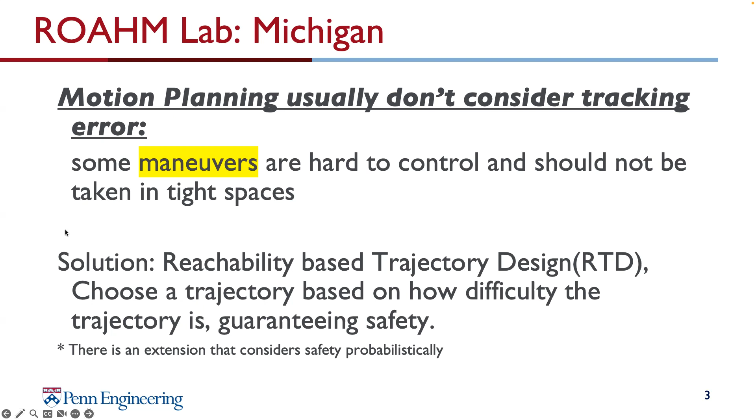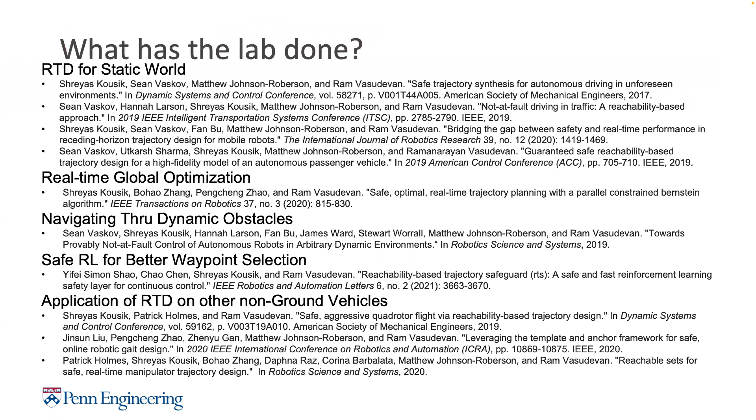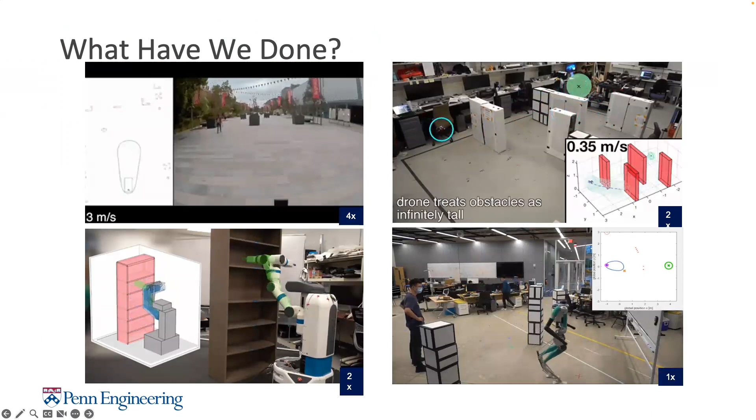So it definitely works. The basic idea is that first we parameterize the trajectory. It's a common technique where we say, okay, we're not going to take any combination of control in the future 2 seconds, for example. We're just going to consider the ones in our control parameter space, and this way we have a limited number of options.

We still have an infinite number of things we consider. For example, the x-axis may be the desired longitudinal velocity, and the y-axis may be the desired lateral position. So if we have some initial condition, we can have a smooth polynomial connecting these two points, achieving a lot of different controls that way.

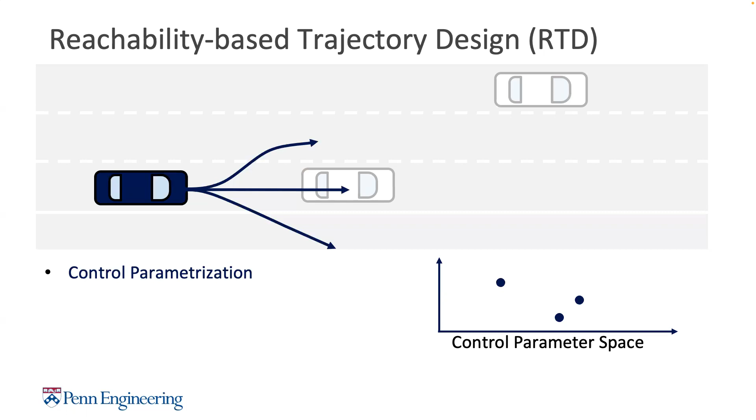However, of course, it's going to be somewhat limiting because you don't take a different U input every time step, like you do in the optimization or MPC case. So that's the limitation, but it helps us say more about safety.

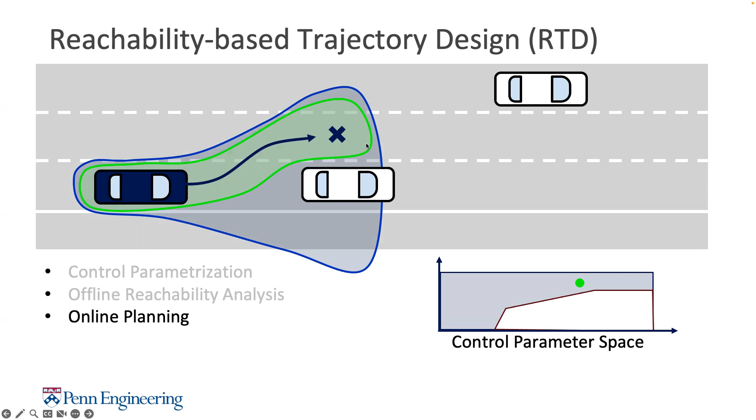So after we parameterize the trajectories in a way we like, we compute the offline reachable set in a way that it is sliceable, which means we can take a specific point in the parameter space, like the green point, and then just shrink the offline computed reachable set really quickly online, so we can do a receding horizon fashion, planning forward step by step.

As you can see, the obstacles are basically inside the trajectory parameter space. In terms of optimization, we basically run a constrained optimization ensuring safety, where the decision variables are the trajectory parameters. So it's a low dimensional space, not as high as maybe MPC, which might have 100 time steps in the future and 100 decision variables. Here it's just 2 decision variables for the future, let's say 2 or 5 seconds, something like that.

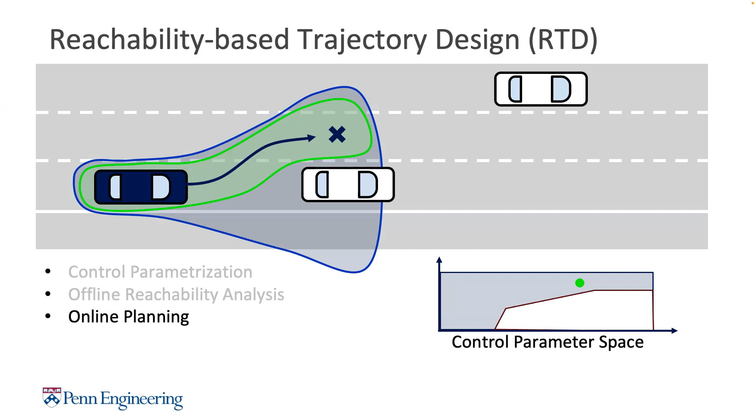Okay, so now we know how it approximately works. Let me talk about what is the representation we use for the reachable set. Here we use an object called zonotopes, which looks like this.

Let me just quickly draw this. This is basically the center of the zonotope, and this is a zonotope in 2D. When you add generator 1, it becomes a line that looks like that. When you add generator 2, it becomes a parallelogram that looks like this. And when you add generator 3, it becomes a hexagon that looks like the thing out there.

So zonotopes are a good object to consider, because if you do a polytope and do linear propagation of it and then try to bound the outside again, the number of half planes you need to represent the polytope grows very quickly. But zonotopes, as this guy showed, who was actually a Penn guy many years ago, the number of generators grows, I think, linearly. I'm not too sure, but it grows reasonably with propagation for many steps forward.

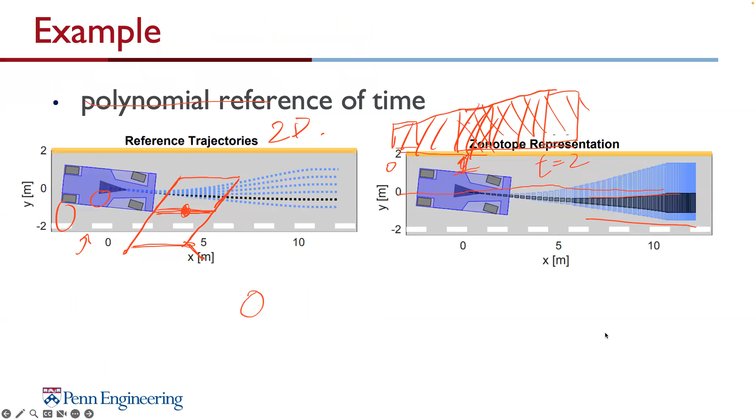But the problem with this approach is that it can be generated sort of slowly, not as fast as we'd like. So you can't just say, let me generate this online and say it's safe. So basically, we have to resort to what I said earlier, which is computing things offline and then applying them online.

This is an example of converting a polynomial reference trajectory into a zonotope representation. So here, the reference is basically a function, these lines are generated by k, which is the control parameter, and t in terms of time. So the zonotope reachability thing basically takes in this ODE and propagates it forward. These are basically explicit evaluation of the polynomial.

But on the other hand, here is the zonotope generation of it. The blue one together is the not-sliced one, meaning, as I was saying earlier, we generate something offline and try to slice it online really quickly. So the black one here is the sliced one, which we say, okay, maybe k equals, for example, the lateral displacement, if k equals -2, then it becomes this black one here. As you can see, we do get some conservatism. On the black line on the left, it's very thin. On the black line on the right, it's sort of huge. But we do gain the benefits we talked about earlier.

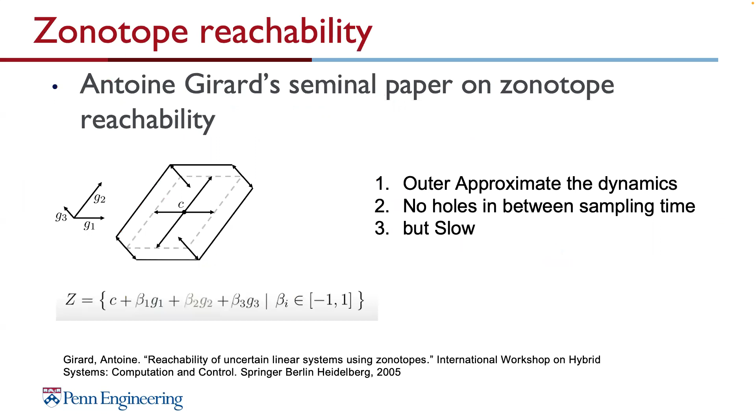Generating the speed trajectory is not doing any reachability. Oh, this is doing reachability. Okay, so previously I talked about zonotope reachability for linear systems, but there's a group in TUM, Matthias Althoff, who worked on extending this to nonlinear systems, so we can have more representations for our reference trajectories.

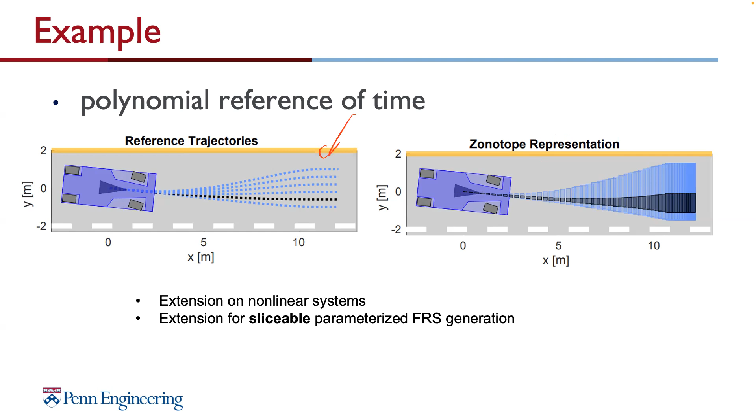Also slicing extensions. But the problem is this is still not good enough, like generating these reference trajectories, generating reachable sets for the full dynamics. For example, if you have bicycle dynamics and parameterize the steering angle from time equals 0 to 2 seconds. If you do that for the full dynamics, still not good enough, meaning it will expand like crazy. For example, here it's a polynomial so it doesn't expand too crazy, but if you do the steering angle parameterization, it probably expands like this, which is pretty unusable.

What are you parameterizing for here? Here is parameterizing. Actually, I have a slide coming up for that, if you just hold on for a second.

So instead, what we do is we split the reachable set into 2 parts. One is the sliced planning reachable set, which is the black region we talked about earlier. And another region is the error reachable set, which means how much difference there is between our real vehicle experiment and our black reference lines. If we add these together, we get the actual reachable set for the car.

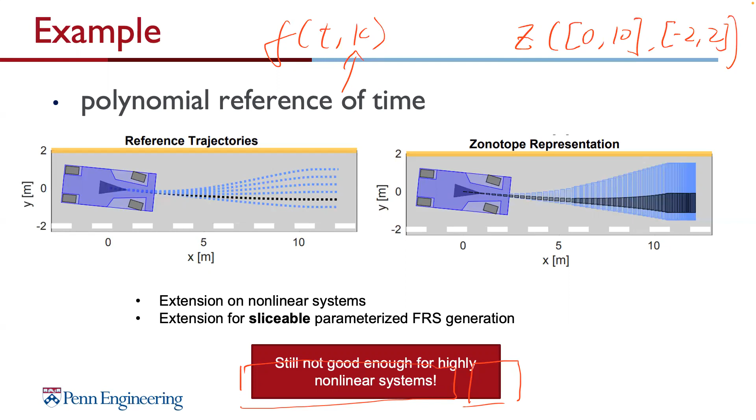What's the model you use here? The car model? No plot here is generated by a car model, right? But in the simulator, we use somewhat an extended kinematic model, because I'm going to say more.

It's just that this first work here is like that, because the main goal of this work is to do safe reinforcement learning, which I haven't talked about because I'm going from a more basic, more core algorithm to applications.

How do you ensure that plus the ERS it's still reachable? Because the ERS is actually generated by doing a lot of experiments, right? Like, this is the experiment, this is our reference, and this is another experiment, another reference. So the experiment corresponds to the reference.

Yes, the experiment is your experience of following that reference. I thought you generate a bunch of experiments and use all of them. Yeah, then it would have huge errors. We want them to correspond to each other.

How do you do this experiment? That's a lot of things. Yes, it's a sampling based method which makes all the guarantees go out the window, right?

So what happens is we have some notion of where the largest tracking error would occur. For example, when you have the largest control parameter, when you try to most aggressively change your desired lateral position.

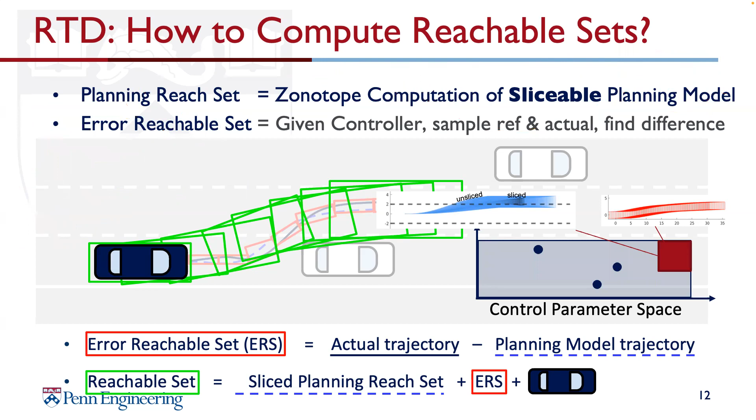This is just an example where we have 4 parameters. 2 of them are initial condition parameters, which we will slice according to the initial condition. And 2 of them are desired, which we can choose online. It's on a straight highway, so the heading is absolute, like the heading is with respect to the Frenet frame, let's say.

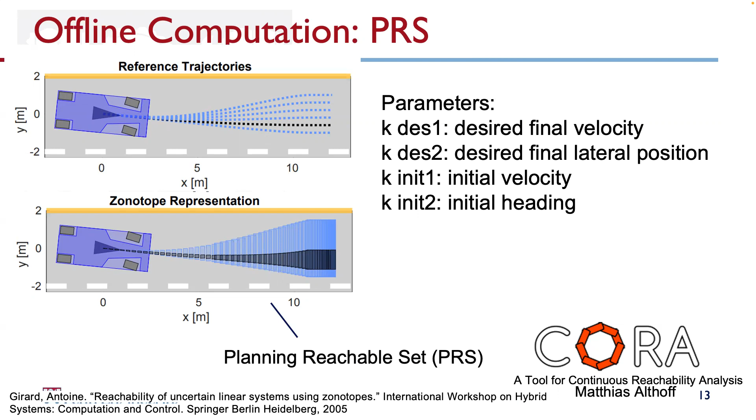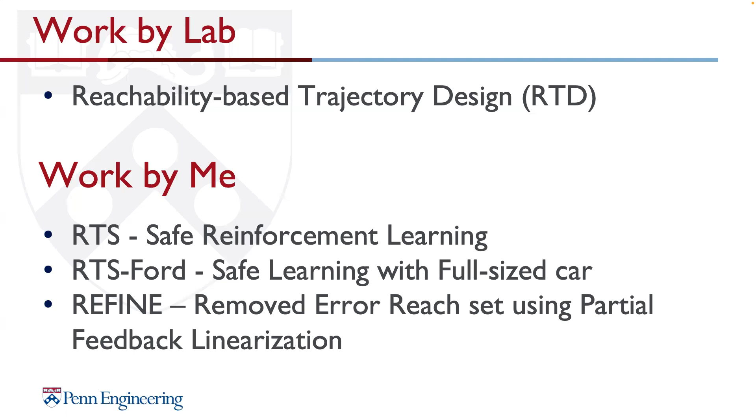So extensions basically, or the things I did, is because we can have this modeling based approach to safety, and it makes a high dimensional problem into a pretty low dimensional problem, we can use that for safe reinforcement learning, because reinforcement learning is sort of good when you consider, oh, we have Atari with 4 inputs or something. So now we just have a game that has only 2 inputs, basically, if you consider the two parameters that you can choose online, in my previous example. So that allows, one significant thing is, it allows reinforcement learning in the real world without any training in the simulator. Basically, you can ensure safety, but the game that reinforcement learning is playing is a much easier game that never hits any obstacles. So,

This is not a real world experiment, this is in the simulator, but the yellow and the black lines are the things proposed by a reinforcement learning agent. The black line is the RT, we call it RTS, basically safeguard. The safeguard corrected parameters, polynomial reference lines. You can see on the top, it always ensures safety and even brakes to a stop when there's no safe parameters available. So one thing I forgot to mention is at the end of each planned trajectory, we have a fail-safe trajectory at the end that takes the car to a stop. So it's consistently feasible, as other receding horizon methods do. On the bottom, you see a naively trained, or a baseline, where it's only reinforcement learning based, and it gets to the goal 90% of the time, but crashes the other 10% of the time because it doesn't have this sense of safety.

So, on the right, you see how the correction mechanism works. Basically, if you have a parameter chosen by RL, it will sample the parameter space and choose the closest one that's safe. This is a reachable set for the green point that's drawn here.

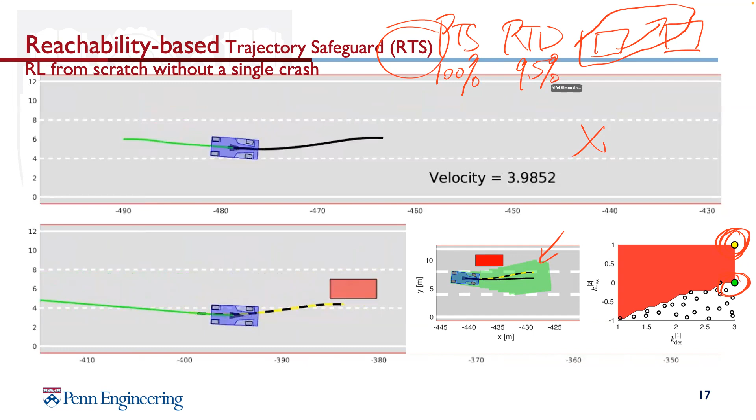Can you say something more about the existence of the fail-safe trajectory? Because this is always ensuring that you have this safe solution. So how does it work, is it a common assumption that you always have this option, like the slowdown?

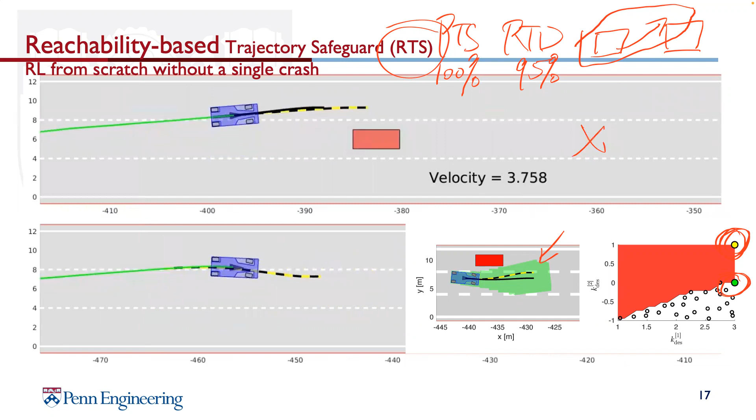Yeah, like the existence of it, like. Yeah, so the fail-safe trajectory in this pretty slow car, like 3-4 meter per second case, is pretty obvious, where all the obstacles are static obstacles that stay in place. But I did apply this to a Ford vehicle, which is the funding agency of the lab at the moment. So we do apply this there, and these fail-safe to stop the car from 70 miles an hour to 0 is not great, right? So I mean, I want to say, because we need, so you solve the problems you can, right? Because we need this safety guarantee, so we have to assume that such a fail-safe trajectory exists.

Can you do that if the other car is moving? Because it will depend on the future behavior. Yes.

So what we can say is, if we have perfect prediction of the other guys, then we are not actively hitting someone, meaning we're not at fault. And that's all you can say about the sense of safety: you're not at fault when someone is trying to hit you. But I do want to talk about the Ford case, which is more practical, and I think it should solve some of the questions you have about this.

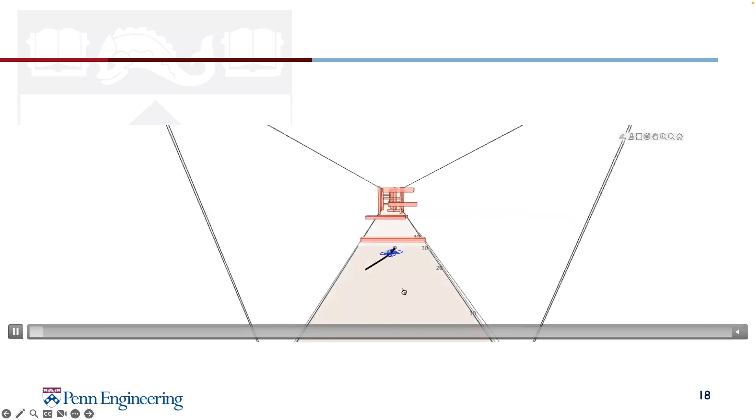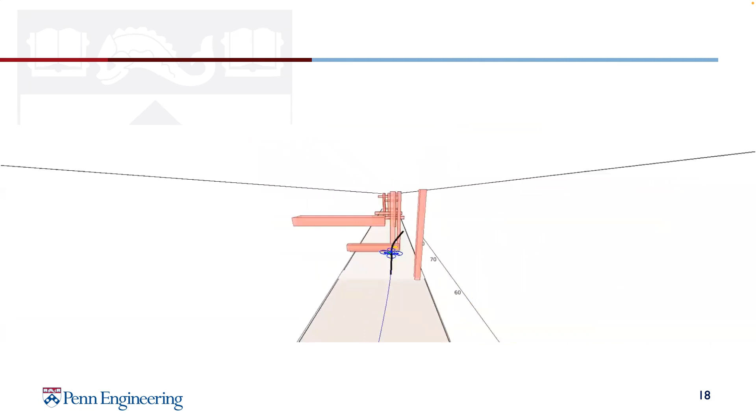But before that, I also want to show this similar thing for a quadrotor. The reinforcement learning just learned a stupid trajectory to always go forward and upward a little bit, because that seems to be the best. But the fail-safe, the RTS, is good because it will avoid things.

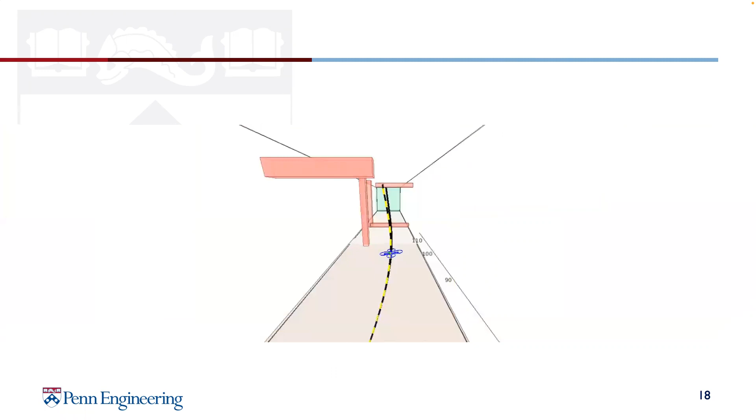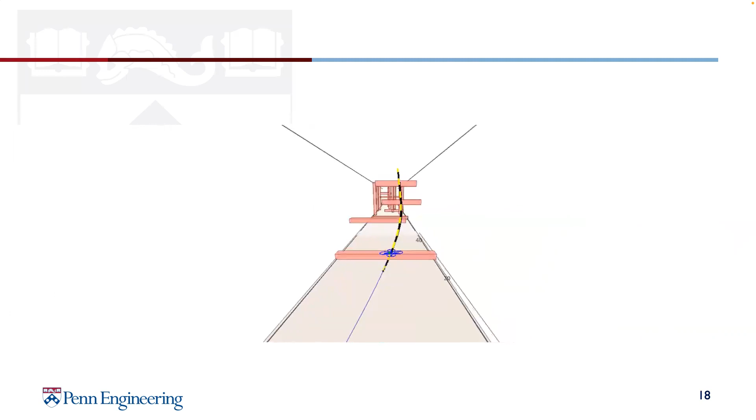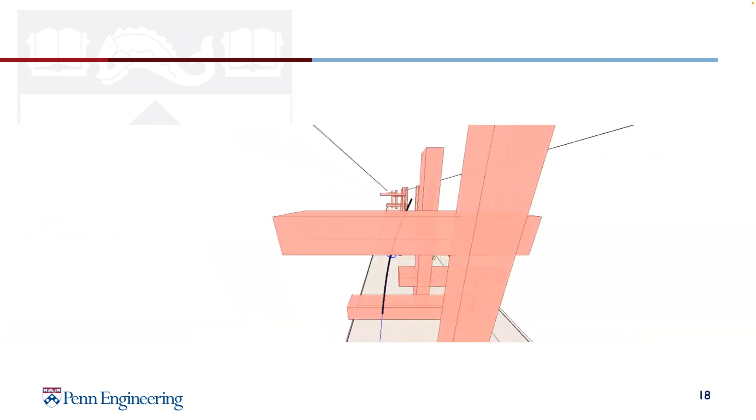So the difficulty in extending this to other systems is finding the control parameters. That's the hard part, right? Finding a control parameter space that's low dimensional enough for reachable set computation, and high dimensional enough for doing interesting maneuvers. Honestly, cubic splines are good enough.

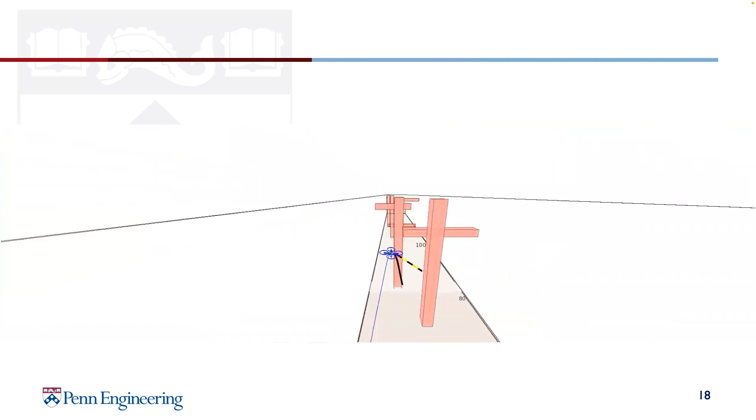So my question in this case is, who's driving in this case?

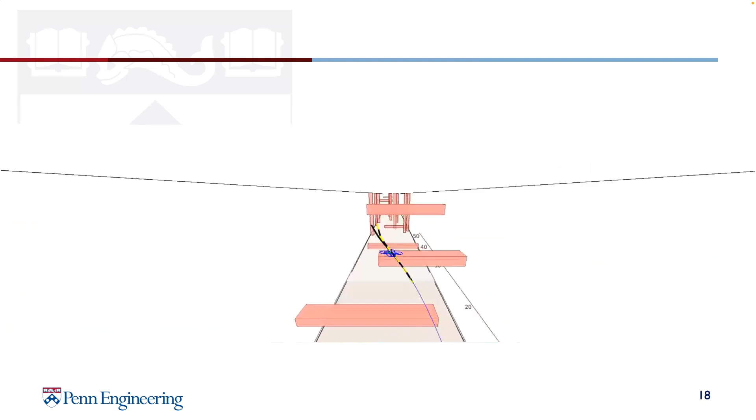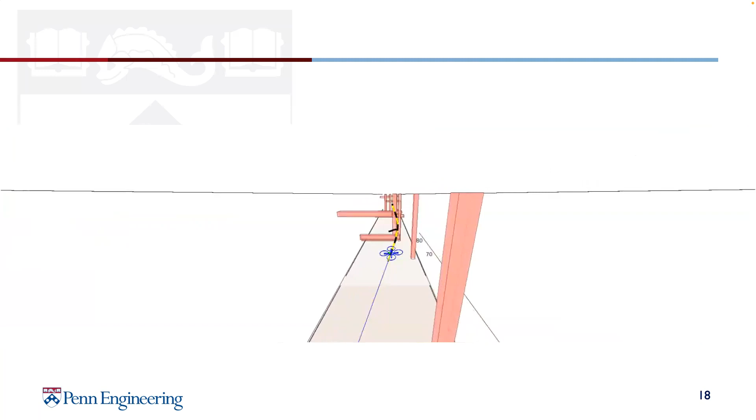So I also trained an RL agent that doesn't use this RTS. It just stays in the starting location and doesn't move to the goal, because it's so far away there's no way it's going to succeed and gain any positively reinforced reward.

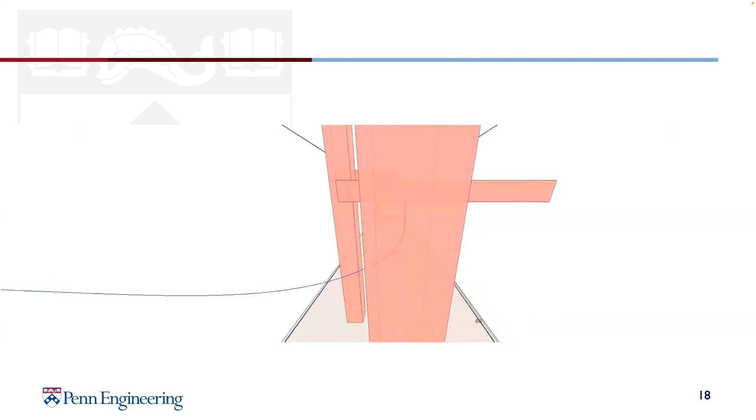So have you tried just one command, just go forward, and use the RTS to correct it? Does it reach the goal? It probably will, 50-60% of the time.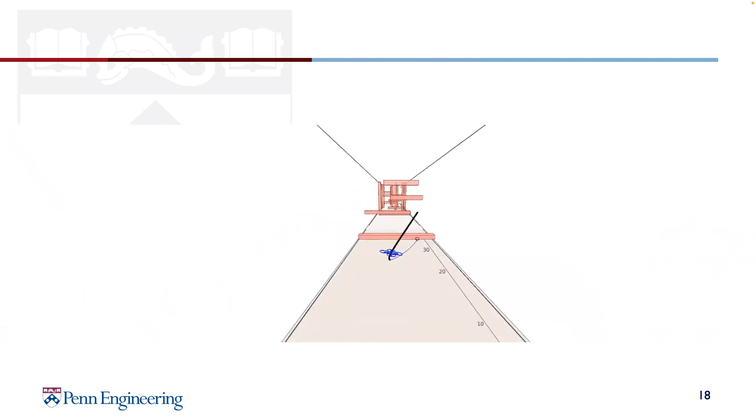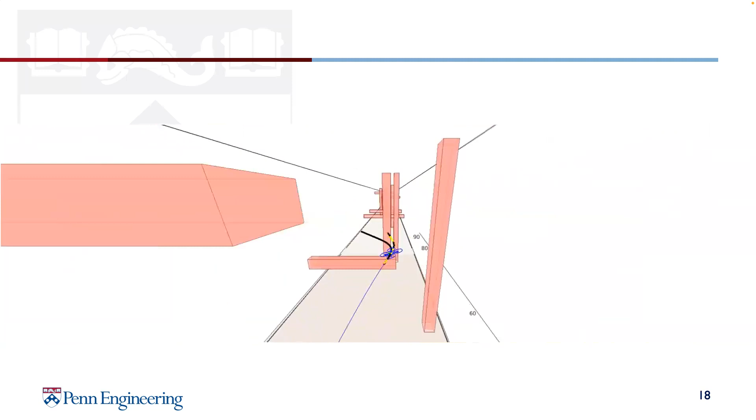So you don't quite need an RL, right? You need some simple heuristic. Honestly, you could random sample points, because the only collision you need to break properly would be if you're going straight forward and there's an obstacle straight forward, and the RTD controller will just make you stop, right? It will just stop and you keep going forward. So it needs some sort of perturbation in the lateral direction.

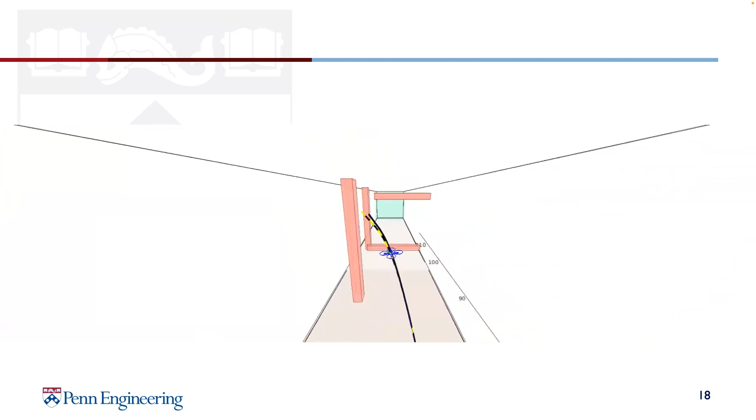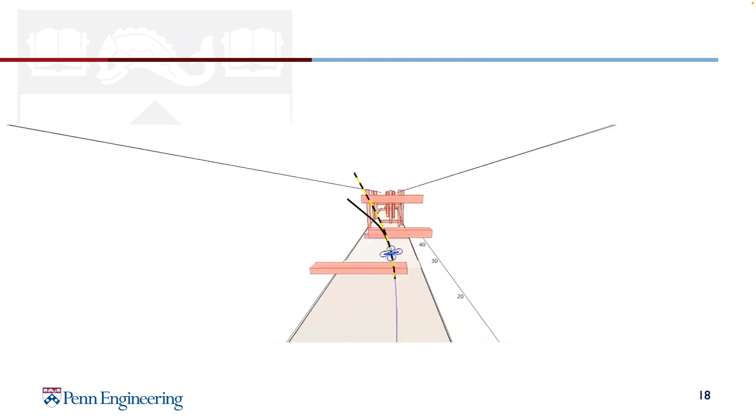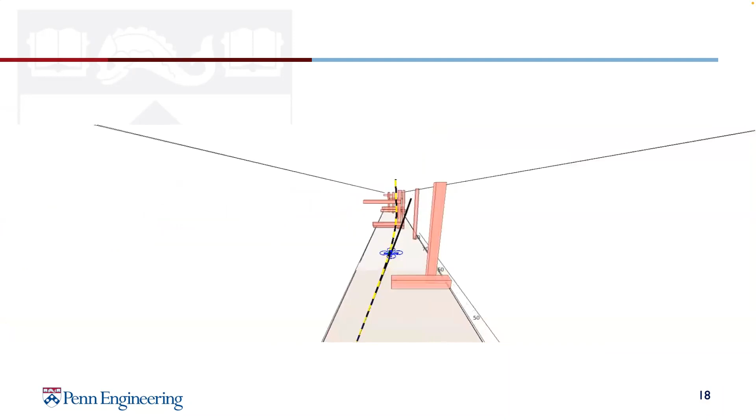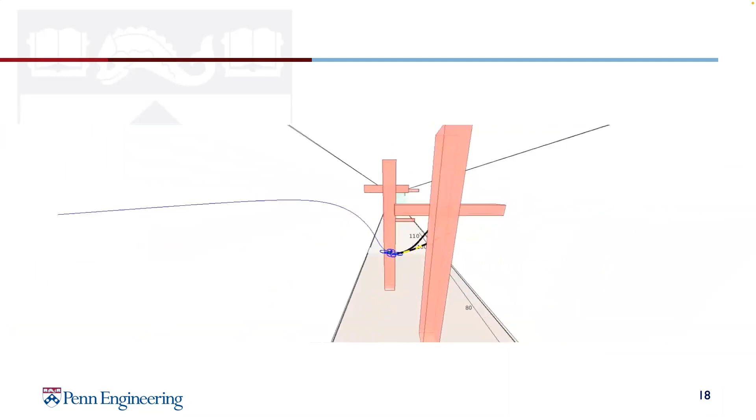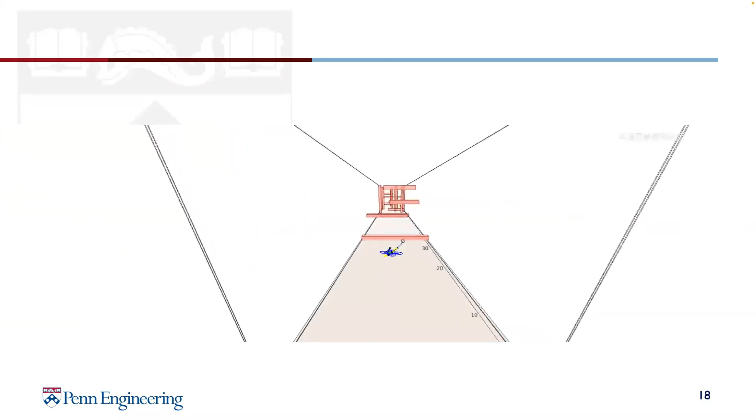Okay, cool. So basically this is what I talked about: RTD, which is planning reachable set via sliceable zonotopes. The error reachable set is samples of the difference between the planning model and the simulator. And the high level planner is RL. The bottom ones don't really matter.

And at Ford, we want to make things fast, right? Like, we'd like to plan at 20 hertz, for example. And the high level planner is actually powered by some RL algorithms. I'm not going to say any details, but it's interesting.

However, the zonotope conservatism you see in the black line, the black zonotopes, is too much for industrial applications. Therefore, we try to evaluate polynomials online quickly. Of course, all the guarantees are out the window, but it's okay because we just need it to work well.

A good thing about this real world experiment is that we can actually do experiments with different perturbations, different actuation levels, and say, okay, what is the difference between our planning model and the experiment? Oh, so you guys have a Ford. I actually interned at Ford for 7 months to do this.

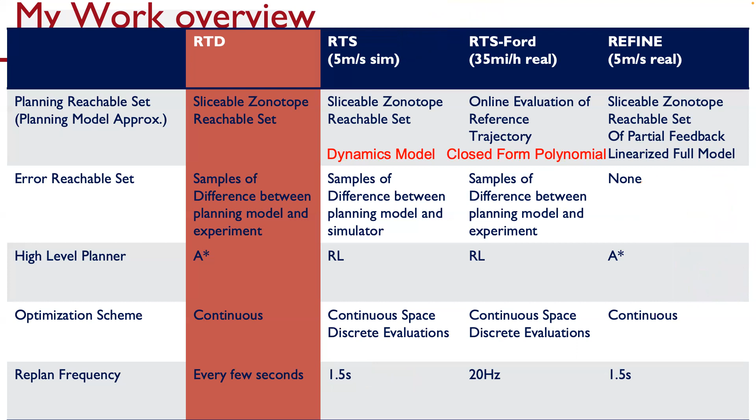I'm liking this iPad presentation. I haven't done any iPad presentations before.

This is an experiment with a real car, which we recorded into a ROS bag and converted to our MATLAB visualization. There are 3 lanes, with dashed and solid lines, and the car in front of us is actually riding in between 2 lanes. So it would be hard for traditional algorithms to avoid this, since you don't know how much it's in your lane versus the other lane.

Do you consider it in that lane or in our lane? At the same time, the car in front will try to brake really hard. We were sitting in the real car, very nervous, watching to see if our car could avoid the car in front that was braking. If it messed up, we'd crash. My boss sits in the driver's seat, I sit in the passenger seat holding a laptop, and he keeps asking me, is it gonna work? Every time he thinks it's bad, he takes over manually.

But eventually it worked. The yellow indicates when it's actually doing something, and it will snap to a grid if it finds another lane center that's safe.

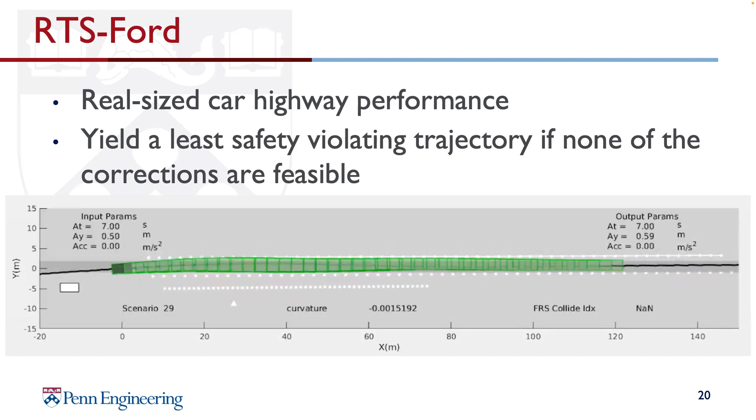If they're at the same speed, then they're just gonna move forward and it's okay. So the car braked, and we still assume constant speed, but a little slower. There are really simple trajectory prediction models, CTRA and CTRV. They're using CTRV, constant turn rate and velocity, which is simple to compute and pretty good. When the car slows down, you consistently update your predicted trajectory for that other agent at every planning step, so once that car slows down, you can see the collision is effectively avoided.

I'm wondering, when it's doing the maneuver, before that, there's a car over here, right? Is this car taken into consideration? Yes, all cars are taken into consideration, but that car is parked on the side of the road, so it's not moving. We're moving at about 35 miles an hour in this experiment, so everything is relative, it's ego-centered, so you can't really see what the other cars are doing, I'm just asking if that parked car is taken into consideration when doing planning.

Yes, so this car could accelerate, right? Then that maneuver would not be valid. But it didn't, so we don't have to care. No, but it could—I'm just saying if it's me, I won't do this maneuver. This is quite dangerous because this car could accelerate.

No, you see all cars around you—it depends on the perception system, right? We have a maximum of ten cars we can deal with. I'm just saying, is the possibility of this car accelerating taken into consideration when generating this trajectory?

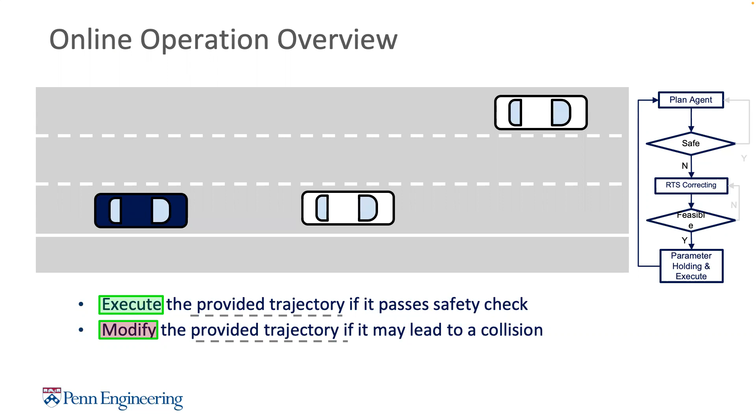And one good thing about this is if it turns out none of the corrections are feasible, we can still choose the one that is least safety violating, meaning we have each constraint's violation value, and we can say let me choose the one that hits the least. It turns out sometimes this is actually useful.

For example, this one here - when you get here, did you see that it briefly flashed all yellow? That's when none of the trajectories are feasible. What actually happened, about here?

It's because I set the lane edge as a constraint as well. So it will say, okay, everything is going to hit the lane edge, what am I going to do now? It will try to avoid the lane edge as much as possible.

Where does it brake hard? Where it brakes hard, because braking hard seems to be a way of avoiding it. Where is the limit from the deceleration? The deceleration limit is -1.

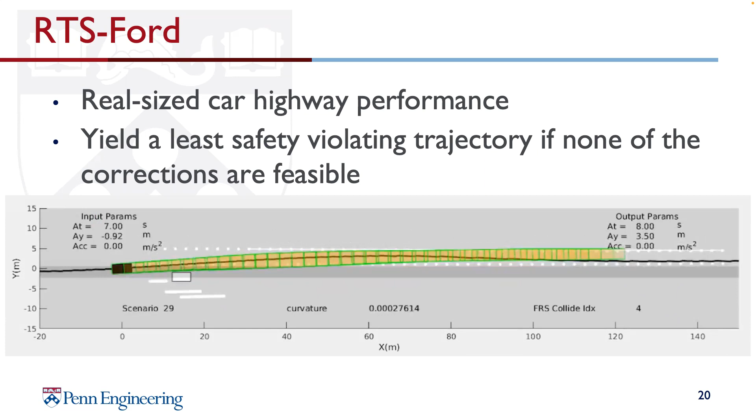So you don't put priorities among the different constraints? Yes, there's a cost function, and there will be a different cost function when none of the things are available. Can you have some slack on some of the constraints? Like for the lanes, that would be the same as this, right? Choosing the least violating is sort of like a slack, but choosing the lowest cost one is sort of different.

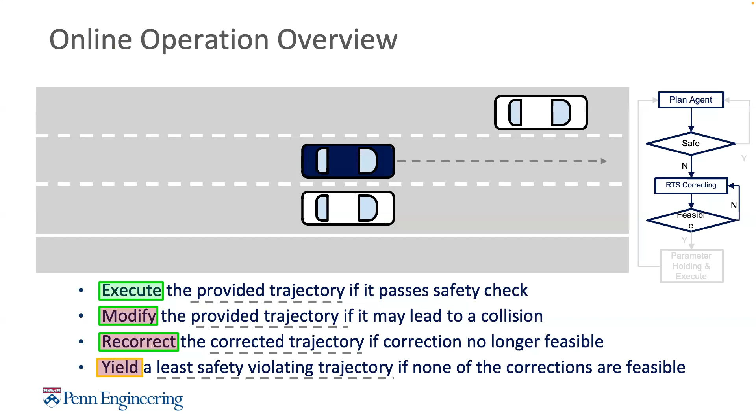So your zonotope approach, how do they deal with it? In my understanding of the zonotope approach, you're computing the whole reachable space and then to obtain the correction factor, are you solving an optimization problem there? Because it's not just the closest one anymore, it's the one with the least cost, so it's a slightly different formulation. I don't know how you do the search.

So we just prefer to go straight. We don't consider it as - let's follow the high level decision as much as possible anymore. We just say, okay, if the high level decision is bad, let's throw it away and try to go straight, but do as much as we can to ensure safety. Got it, yeah.

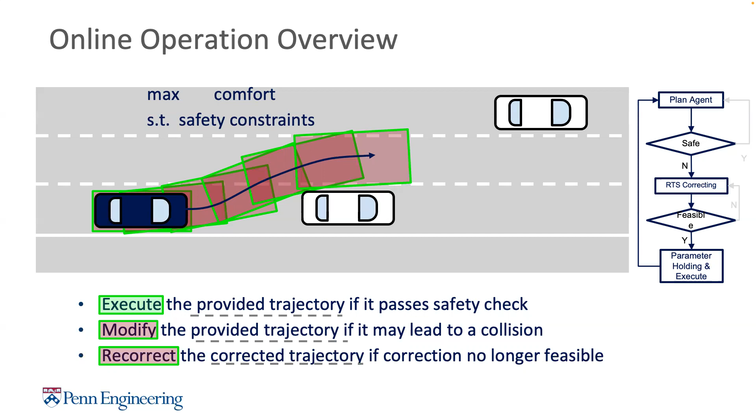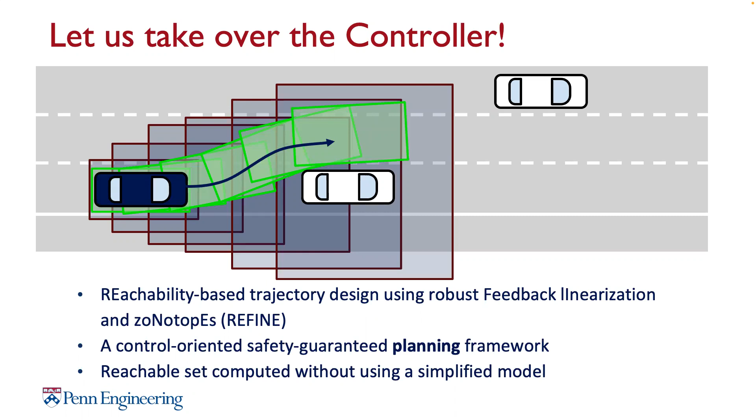So actually, these two work, and a third one is on the F1/10 car, where we get rid of the error reachable set by doing a feedback linearization controller on the vehicle. So the zonotope generation module only sees a purely linearized dynamics, therefore it can generate a fully sliceable reachable set, not including the error reachable set.

So let me just skip everything and show you guys the result.

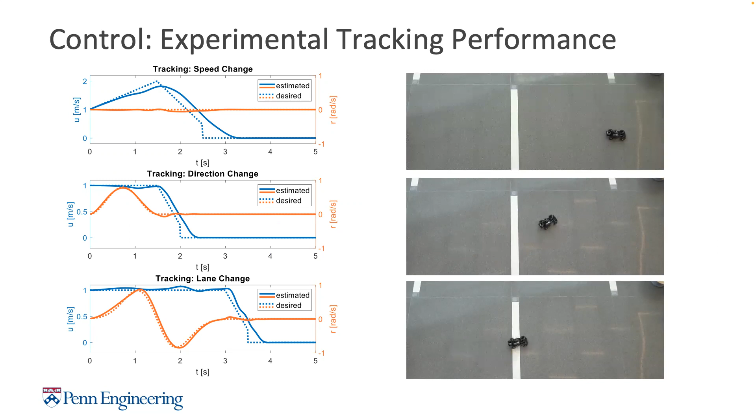Is this paper out? Can we read it? It's on arXiv. You would have known if you came to one of the meetings more often, since that was just him and me talking about the paper. Fair, fair. And we were able to run this in our lab.

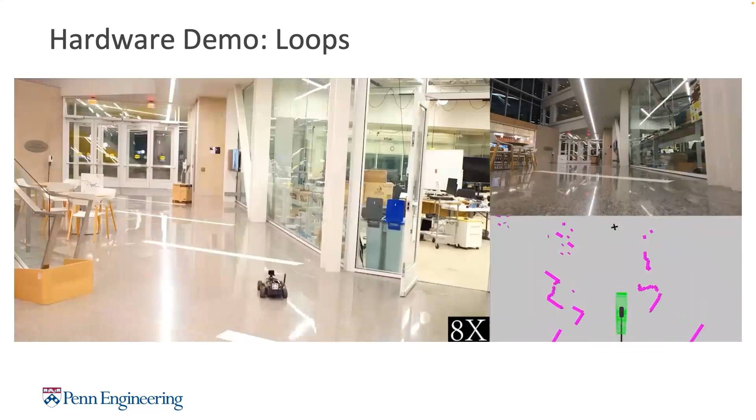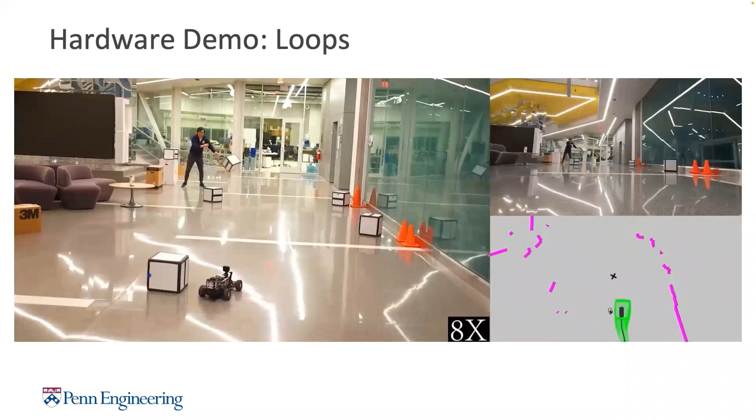Where is this, Pennovation? No, this is Michigan. Oh okay, this looks nice. Is this you throwing the box? No, it's one of the people on the team, one of the master students.

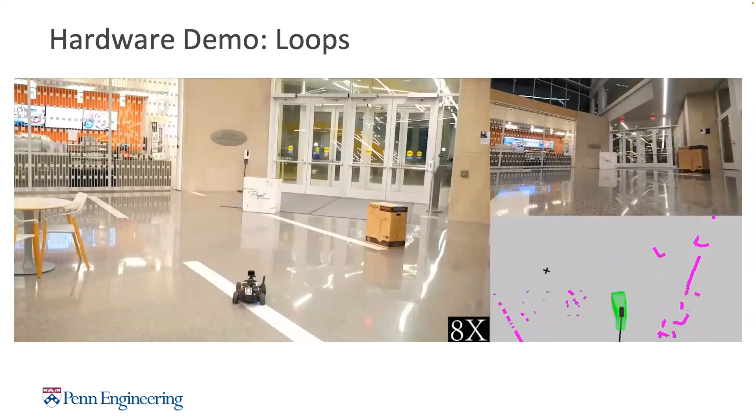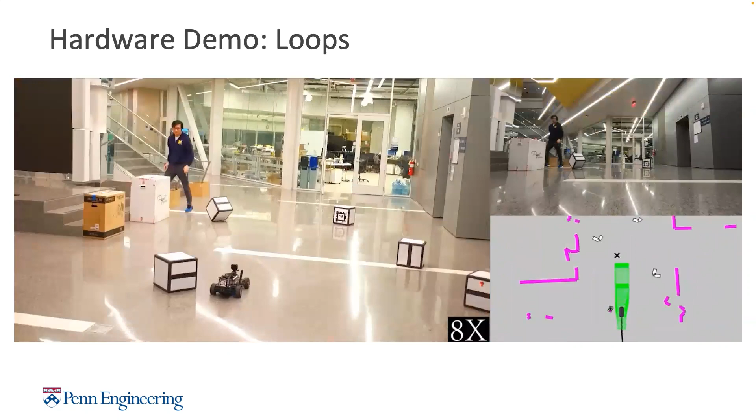So this is just dealing with static. How hard is it to implement? Very hard, very hard. If I want to do this in C++, for example. We did this in C++. It's probably open source, we probably don't need to do it again. But how long did it take you guys to do it? I don't want to say it. Months? No, it's like about a year. And how many people did you have doing it? Three.

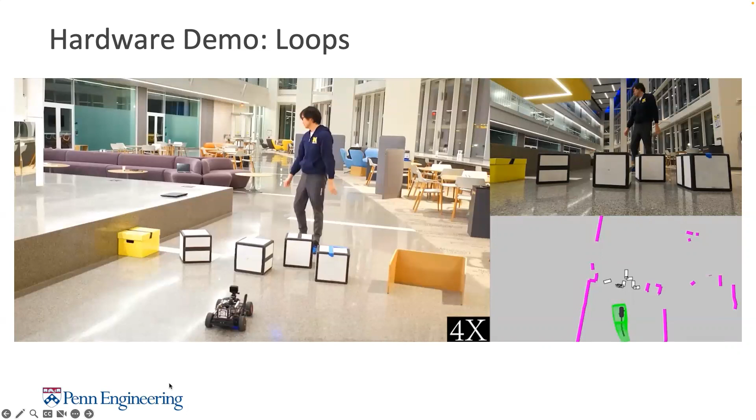What's the hard part? So we first have to do the car modeling, which takes a while. But I guess it's because we don't have too much car expertise. Our lab does a lot of things, walking robots, drones. Nobody in the whole lab has expertise on a single platform, which is good and bad.

So do you have a Vicon space? We have a Vicon space, we don't use that here. So when you did the model ID for the car, we did SLAM. We did a VL, it's a Hokuyo LiDAR.

Yeah, and actually the suspension was giving us a lot of problems, so we changed out the springs for very, very stiff ones. And then when you drive it, you actually feel like it's a race car now, it's not a buggy car anymore.

I think this is what you have to change. Yeah, this is what we do with all of ours, you have to change this. We just got the McMaster one that's kind of like 20 Newton per meter. You can get ones for the Traxxas. Actually, I didn't know that these existed. So what I did is I had two other car kits, and they all have bags of spacers, right? You jam in spacers so that half of the distance is spacer, and that spring gets really stiff.

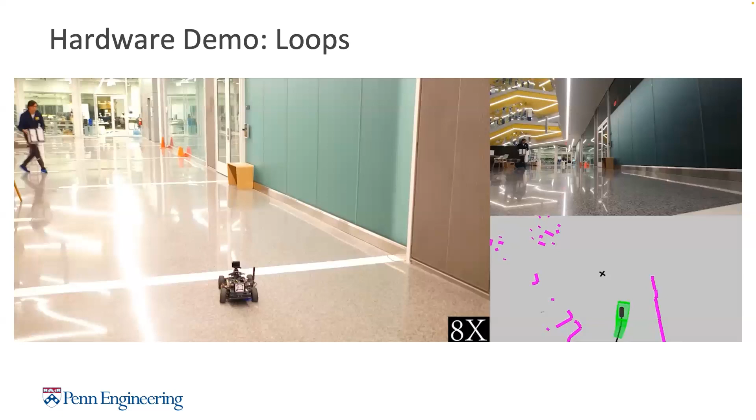So what's the next steps? I'm not working on this anymore. I feel it's too conservative to do very aggressive things.

So after having spent multiple years working on safety-based RL, safety-based systems, your prognosis is not positive for it? Right, no, I mean I'm legitimately trying to understand this because I don't want to just say that.

I feel like if you look at YouTube for Rom's presentation, he extended this to the manipulator side, which is much more useful for these tools because they can compute the reachable set online, since the manipulator by itself is not a super fast system. You can afford to do things online, and it was also able to account for things like generating zonotopes not only for positions but also for force. You can say, okay, this is the force I'm going to estimate, so if I move along this direction and at the same time have this much tilt, my water bottle is not going to fall. But if it stops really quickly, then it's just going to fall. So that's non-linear.

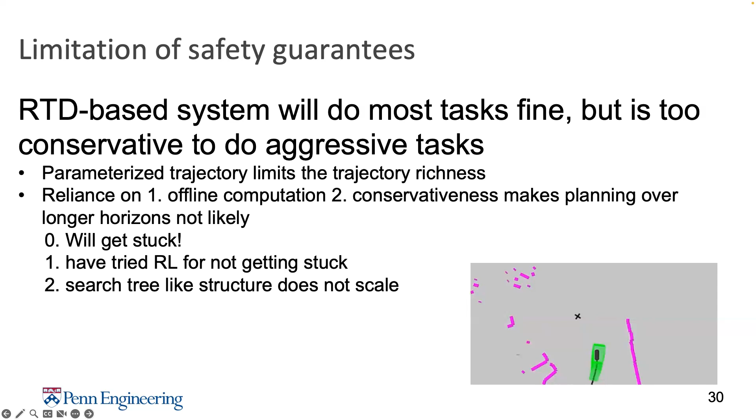So what happens in that case? Doesn't this kind of deal with that because of the... Yeah, I mean, this is the model uncertainty that we put in here.

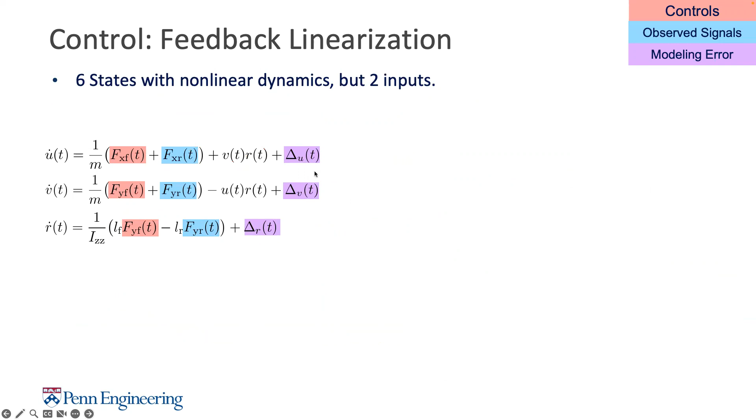We make sure that this is basically bounded, which, in your case, yes, it is an assumption. When you're on ice, all things are out of the window, right? Yeah, exactly.

So probably some online estimation of these parameters would be good, but at the same time the controller needs to change, so I'm not too sure if it's immediately applicable.

So what are you planning on working on? Yeah, so I think I'm now trying a little bit to do some human-robot interaction stuff, carrying a table with a human, that sort of stuff.

That's a very different estimation problem, which I'm not sure yet, but that's the thing I'm looking at right now. But for cars, I also think I don't think walking robots is gonna be that useful in that case.

I feel like something like a mecanum wheeled manipulator would be good, but also maybe a car manipulator case, which have some planning properties, like differential flatness is shown on a manipulator car as well.

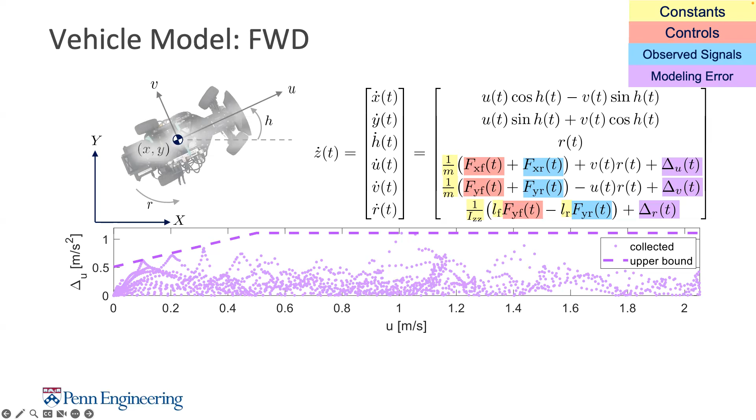So you're looking at human-robot interaction in general? Yes and no, I mean... let me stop this.